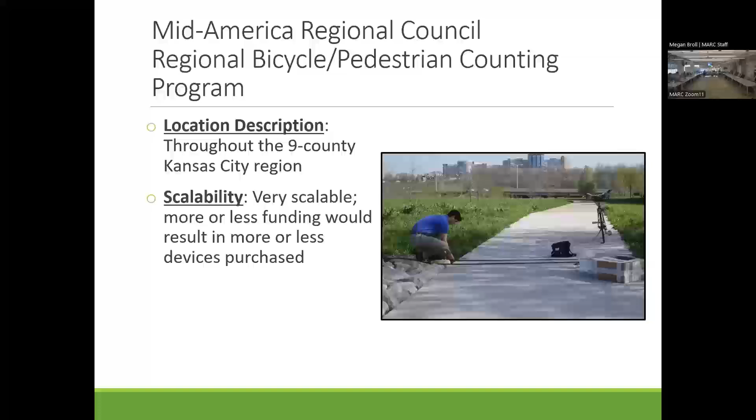Hello everyone, thank you for the opportunity to present our project today. My name is Alysen Abel, I am the city engineer for Spring Hill, Kansas.

Spring Hill is requesting STBG funding for our 207th Street project from Woodland to Ridgeview. This project includes reconstruction of 1 mile of roadway, currently an existing 2-lane unimproved roadway. We would reconstruct it to a complete street design with new curb and gutter, storm sewer, a 5-foot sidewalk on one side, 10-foot trails on the other, along with some street lighting.

This project will address several public safety improvements and needs along this corridor. It will improve vertical sight distance by cutting down a couple of the hills along the corridor. It will remove the roadside ditches and improve the storm drainage system and some drainage issues we have here. We will provide pedestrian access where there isn't any today with the installation of sidewalks and trails, and we will provide a crosswalk along 207th Street so pedestrians can access Legacy Park.

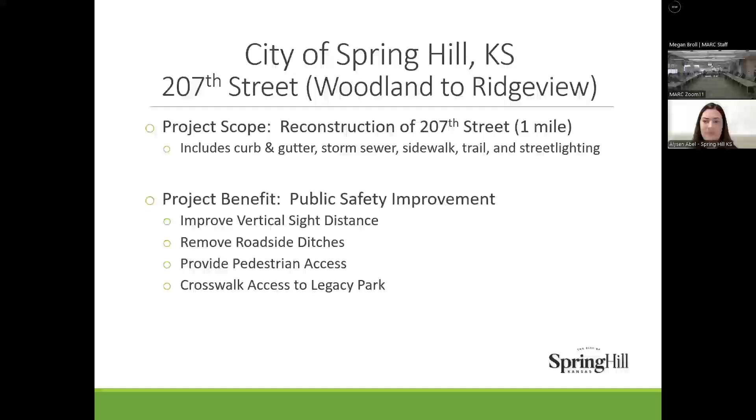Next slide please. This project is part of a larger picture for our community. Starting at 199th and Ridgeview, we have our Spring Hill High School complex, which includes the high school, district administrative offices, educational support center, district activity center, as well as a sports complex. We have a CARS funded project we're working on right now along 199th Street from Ridgeview to Renner, converting the 2-lane unimproved roadway to a complete street design with 5-foot sidewalks and 10-foot trails. This project is currently under design and planned to start construction in 2025.

The other project that connects up at 199th Street: the city of Spring Hill has a TAP application for funding consideration for the East Streamway Trail. This is a 10-foot sidewalk constructed along an existing stream corridor from 199th and Norton down to approximately 207th Street, about where this proposed project will start. This would provide the connection from the school district complex up on 199th Street, all the way down through existing and planned residential developments, and connect to other activity centers in and around this area.

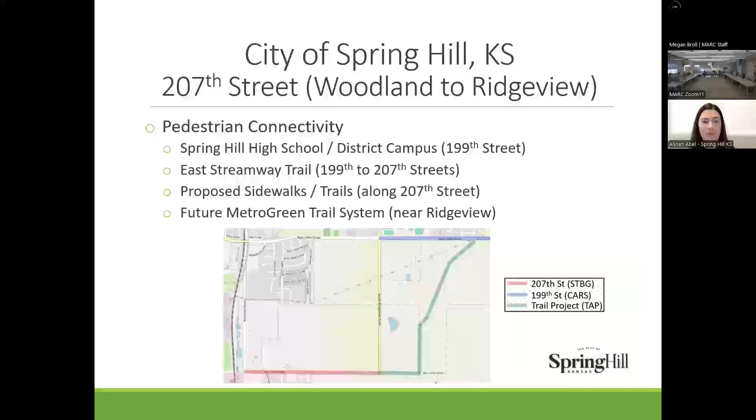And then onto the current project for STBG funding. This would connect at the end of the East Streamway Trail project under TAP consideration at 207th Street, and will ultimately connect into the MetroGreen corridor located along the tributary to Wolf Creek. This project is listed in Spring Hill's Parks Master Plan to address some of our community's priorities, most notably providing pedestrian access. There are very few trails and sidewalks within our community, and our elected officials would like to remedy that starting with this project. This is also shown on our vision plan for neighborhood development in our comprehensive plan.

Next slide please. The total estimated project cost for the 207th Street improvements from Woodland to Ridgeview is over $15 million. The total construction cost is over $13.2 million. The city is prepared to provide the 20% local match.

The scope of the project is unfortunately not able to be scaled down. It includes removal and replacement of the roadway from one intersection to another. If we were to reduce any portion of this, it would remove some of the key components of the complete street design. We have not applied for any additional funding. That's it for my presentation—happy to answer any questions.

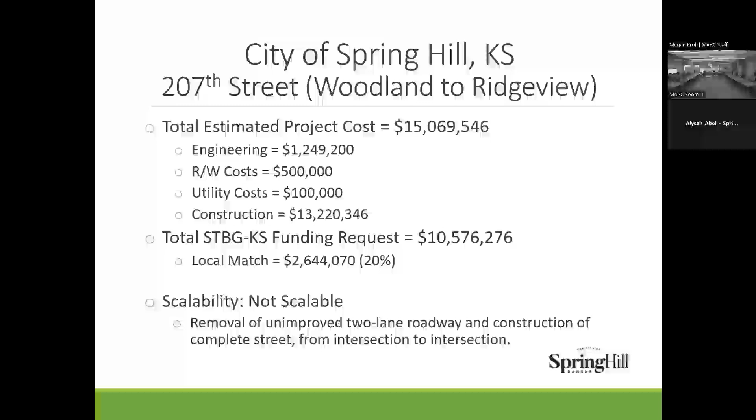First one we have for you today is our Woodland Drive improvements. As you can see on the map, Woodland Drive is an existing roadway, the north-south blue dotted line. It's essentially a narrow 2-lane roadway that acts as an arterial right now, but it's not a very safe roadway.

We've had a lot of complaints from our residents on it, and our city council has really had a lot of interest in improving this roadway. With this project, we'd be looking to expand this roadway to more of our modern roadway standards, adding curb and gutter, a 10-foot trail on one side, sidewalk on the other side, and bike lanes as well, widening out the roadway surface to make it a lot safer for both vehicles and pedestrians.

We're also looking at making a sidewalk connection north of 71st Street with the Shawnee Mission Parkway. That would basically connect all the way up to the Mill Creek Trail system, which would be a big benefit for our community as well.

We are asking for $8 million in STBG funding. The city has created a conservation TIF in this area, which means the county and the school districts are foregoing a portion of their property tax to help fund infrastructure improvements in that area. So the city is going to be able to offer a $6.4 million match on this, which we feel is a significant amount that we're putting forward.

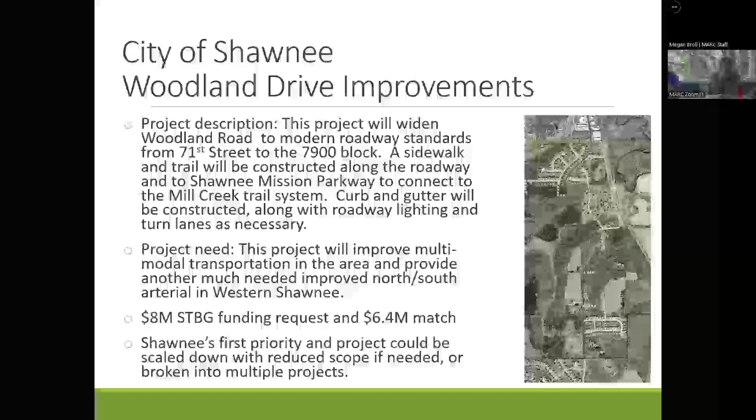This is our second project, our second priority, and this would basically be to signalize the ramp terminals at the 435 and Johnson Drive interchange.

Currently, signals are already warranted at this location, and we are in the midst of having discussions about development in this area as well with several different developers. When that development occurs, there will be a lot of strain at these intersections.

If you're familiar with this interchange in particular, if you're coming off the southbound 435 ramps looking to the west, that's towards Mid-America Sports Complex. Sight distance isn't outstanding, and it can be tough to turn off of there, going east or west. If you're looking to the east, you have the bridge that crests over the top too. So it's a challenging intersection out there.

Luckily, we haven't had a huge accident problem yet, and I think it's one of those intersections that people are aware that when you go, you've got to pull out and be ready to get to the intersection. But that's not really going to be sustainable long term.

So we're asking for $800,000 in STBG funding, and the city is prepared to put up a $275,000 match to get those ramp terminals signalized. This project really isn't scalable for us - we do just want to knock it out in one go. Any questions on this one?

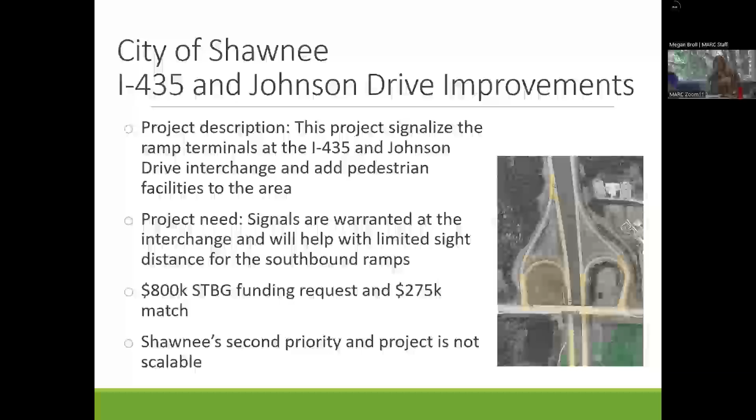Good morning, everyone. My name is Donnie, I'm with the City of Roeland Park, I'm the Public Works Director. I'll be speaking to you today about our project we submitted for the Nall Park, or Nall Avenue, Complete Streets.

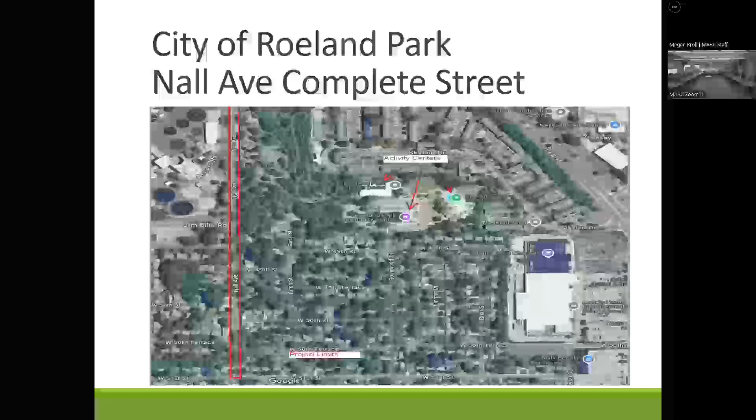The map in front of you, the red box on the left will indicate that's the project limits. We added some areas on the right side which shows access to some of our activity centers. Next slide, please.

So the project is for Nall Avenue from 51st to the north end, which ends in actually one of our largest parks in Roeland Park. Improvements will include full depth pavement, curb and gutter, installation of a new 8-foot wide multi-purpose trail, ADA enhancements, and then signing for Share the Road.

What we're trying to accomplish is to maximize mobility and access to this park and the residential areas, address street preservation and maintenance needs, and obviously provide alternative modes for the bike lane or biking facilities. This will close the gap.

There is a missing segment of sidewalk at 49th Street, about 3 or 4 blocks up from 51st Street. We're trying to close that gap by installing an 8-foot wide multi-purpose trail from that point north up to the park. Our funding request is about $2.2 million from STBG, with our local match being $950,000.

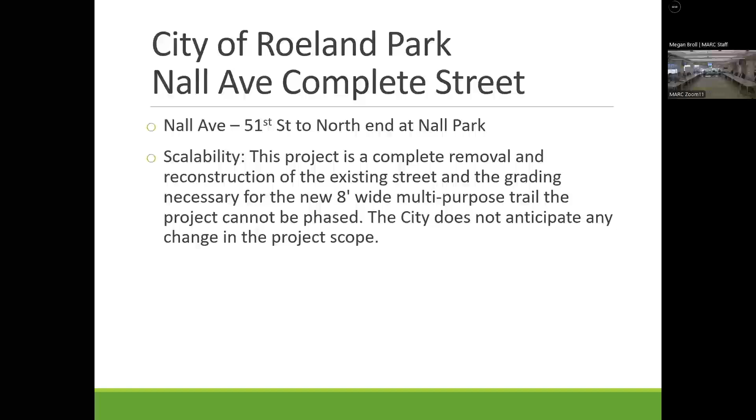Project limits are from 51st to the north end of Nall Park. This will be a complete removal and reconstruction of the existing street, with grading necessary to install an 8-foot wide multi-purpose trail. Our opinion is it cannot be phased. We don't anticipate any changes to the scope.

Working on enhancements of the complete streets elements. There's activity centers to the east of Nall. This connection would provide biking routes to those activity centers through installation of Share the Road biking facilities. Adding that multi-purpose trail to the north end will help provide that connectivity.

I did want to note that we applied for STP funding for the south section of Nall between 51st and 58th, which we greatly appreciate. That project is slated to kick off in 2025. Completing this section of Nall from 51st to the park will complete that connection.

Replacement of deteriorated asphalt, curbs, and gutters, including those trails and share the road signage.

Trying to enhance the walkability and expand our city's trail system.

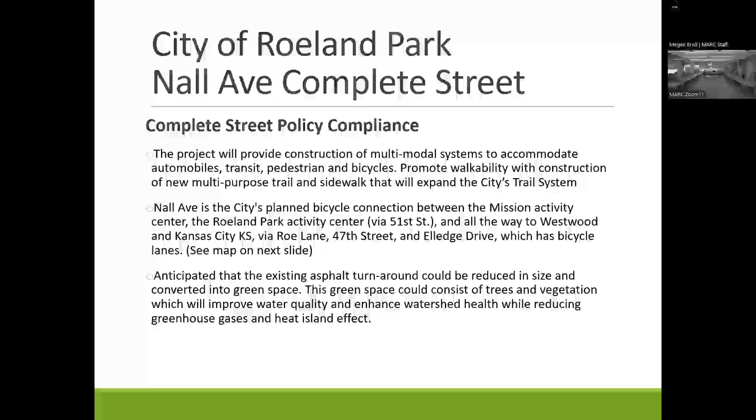We're doing south of 51st to 58th in 2025, which will have signage and sharrows. 51st Street would connect over to the east, where there's an 8-foot multi-purpose trail along Roe Boulevard.

That was completed back in 2020. There are other bike routes that will lead up to the north and over into the city of Westwood, to the east of Roeland Park.

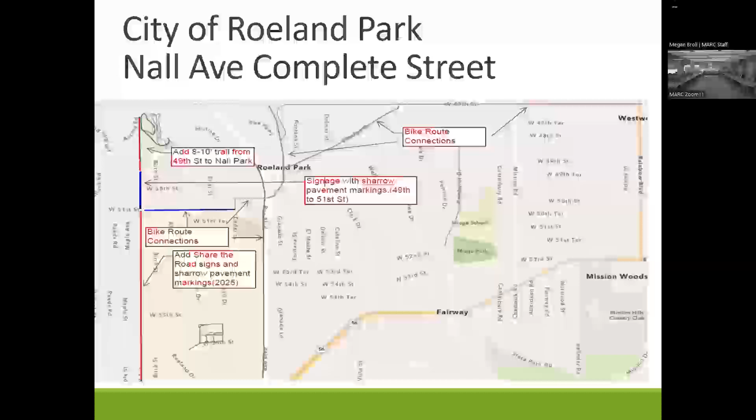We do a lot of public engagement - public meetings, discussions including projects in our CIP, having open houses and getting feedback from residents.

I think that's it. I'll take any questions. Questions for Roeland Park?

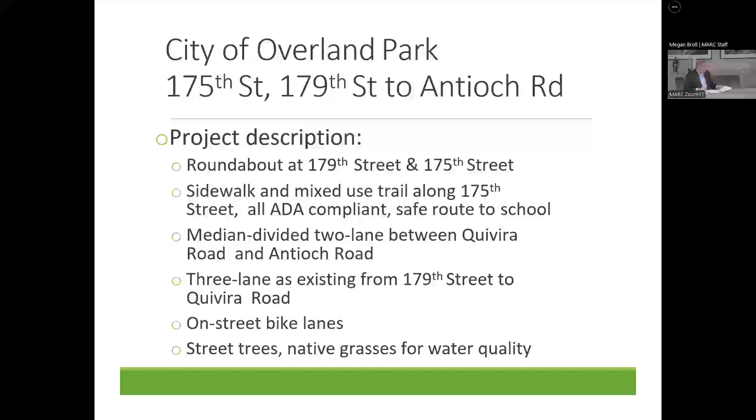The project will provide multimodal options, improve safety and system performance, address preservation needs, and serve a rapidly growing area of the city. We're asking for $7 million in federal funds to supplement the city's match of $14.5 million, for a total project of $21.6 million. This project is our first priority for the STBG funds.

So we have projects completed in design and construction in this area. We've recently built Weir Road. Our next STP construction project is Switzer Road there. And we have been heavily investing in this area.

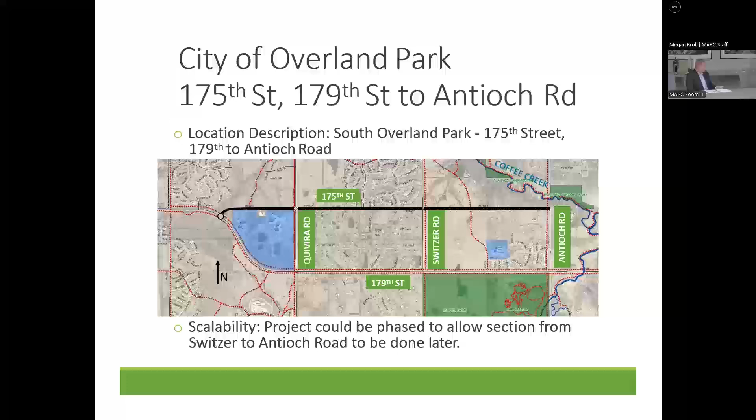175th Street today is an unimproved county road. It's very hilly, does not have shoulders. The roadway is failing under the traffic that's in the area now, and we know that as traffic continues to increase, the road will continue to deteriorate.

As you can see, there's no sidewalks or trails, and students walking to the schools in the area have no place to walk except the road. As busing availability has decreased, the number of students required to walk continues to increase. A lot of school districts are clamping down on busing availability, and that's directly impacting these residents. We've heard from a lot of concerned parents about how their kids are getting to school in this area. 5,000 cars use the road today, and we expect that to double by 2050.

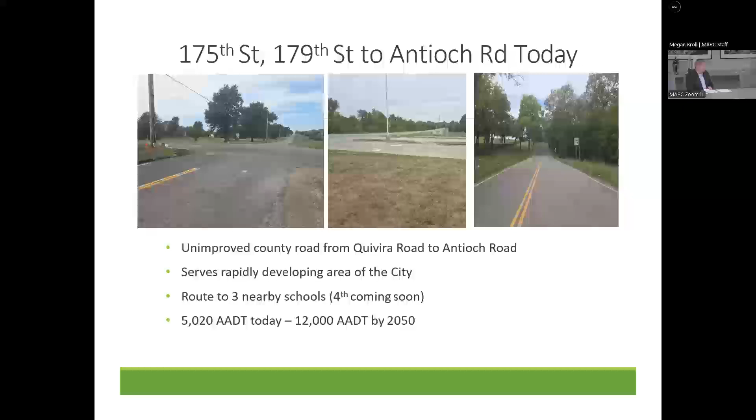So what's our plan? We're going to improve all transportation modes. For pedestrians and cyclists, we will provide the needed trails and sidewalks, as well as on-street bike lanes and shoulders. We do plan to plant some trees along this corridor. We feel like with the road section that we have and the right-of-way in place, we can put trees in the area to provide a better pedestrian experience.

As far as the car traffic, we will construct the roundabout to help with not only accidents, but emissions. And then we'll also make sure this road connects to recent improvements in the area. We know that these improvements will address system needs for years to come.

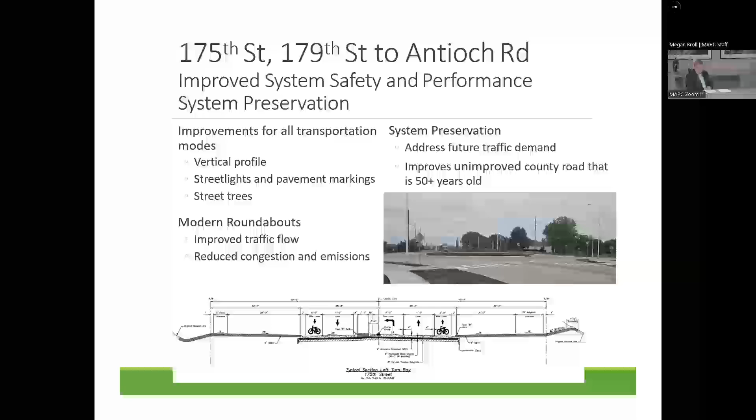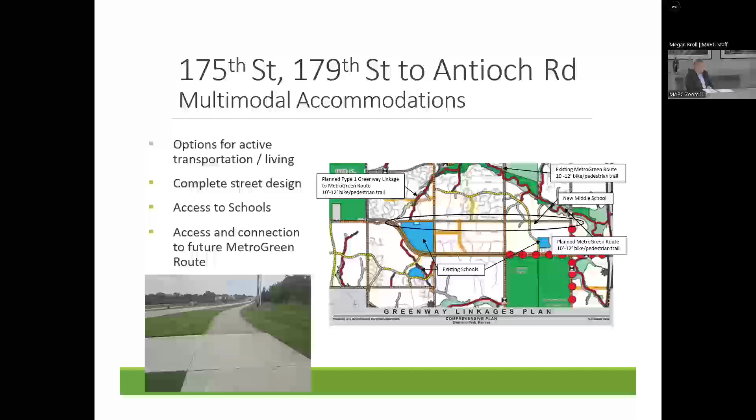Did want to mention, this is also in alignment with our South OP Transportation Plan, where we're trying to only build the improvements now that we need for the traffic now. And then we will plan to use this as a CARS project, and it aligns with our new comprehensive plan framework OP.

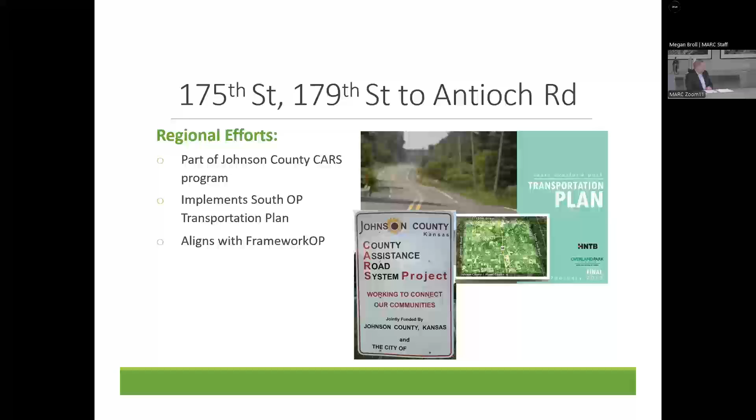So with that, we submitted multiple projects. 175th Street is our number one priority. I do have slides on our other projects if there's any questions, but I appreciate the time.

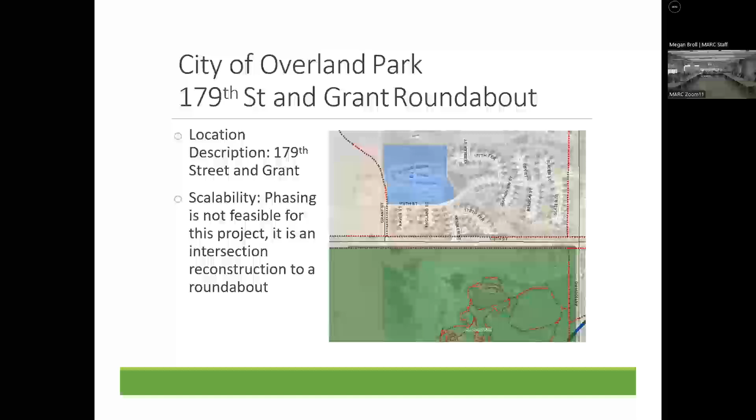Good morning. My name is Neil Meredith. I'm with the city of Olathe. I'll be presenting on the two projects the city submitted.

Our first project is Dennis Avenue, Hedge to Parker. This project will improve Dennis Avenue to a 3-lane arterial in this section. Improvements will include bike lanes, a 5-foot sidewalk on one side of the road, and a shared use path on the other side, which is typically about 10 feet. The city is requesting $5 million, with the city providing the remaining $13.7 million to fully fund this project.

This project has been identified as a priority in the city of Olathe's transportation master plan to address safety and capacity needs in this area.

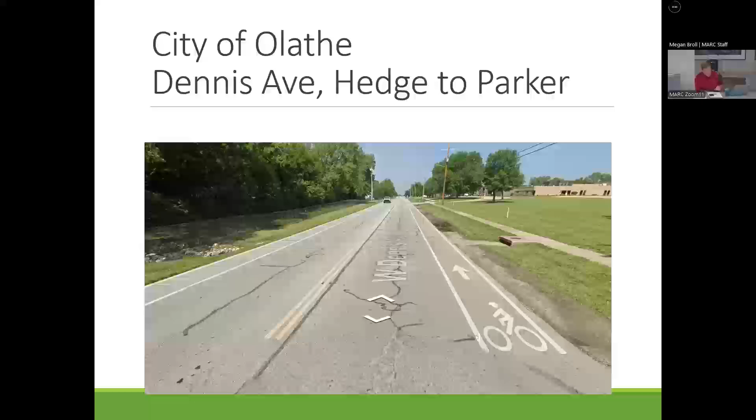Our second project is Lone Elm, 119th Street to Harold, which is 127th Street. This project will improve Lone Elm from 119th to Harold with a 2-lane divided arterial, so that would be a median with turn lanes. It will include new medians, street lighting, bike lanes, a 5-foot sidewalk on one side of the road, and a shared use path on the other, just like our other project.

We are also requesting $5 million on this project, the city providing the remaining $10.3 million in funding. Of our two projects, this is our number 2 priority.

We do find in this section as well that we have a lot of pedestrian traffic and children walking to school along the edge of this roadway, and we do get numerous complaints about that, and it is obviously a safety need.

But that pretty much wraps up our presentation from the city of Olathe, unless there are questions. Questions for Olathe? Seeing any? Appreciate the time. Go Royals.

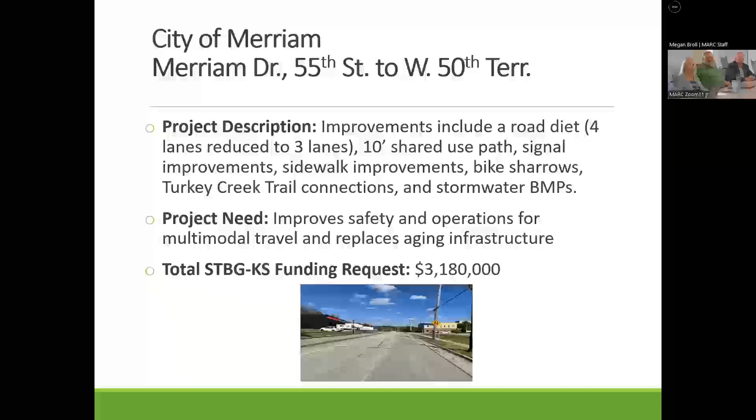So our project needs are improving safety and operations for multimodal travel and replacing aging infrastructure. Our total request is 3,180,000. Our match is 1,320,000. This is our number one priority and our only priority, and we've only submitted for STP funding.

This is part of a larger project. There's a lot going on along Merriam Drive. From Johnson Drive, we have our downtown area, which eventually we're looking at making a mixed use development. We have a Turkey Creek flood mitigation project going on. And then as we go farther north, we've been working with Overland Park on a downtown Merriam corridor plan for PSP and looking at that intersection at Antioch.

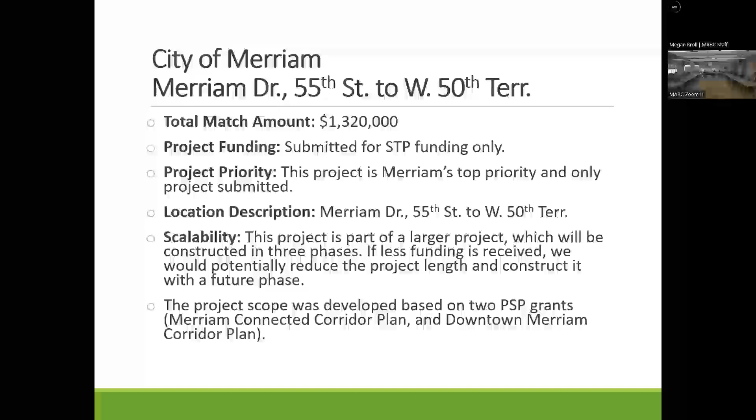So I'd be happy to answer any questions. Questions for Merriam? Not seeing any in the room or online. Thank you, Celia. Thank you. Next up, City of Lenexa.

Thank you for allowing us to present. This is Tim Green, city engineer here in Lenexa. Our first project, and which would be our number one priority project, would be 83rd Street from Clare Road to Gleason Road. The scope of the work would be to widen the existing 2-lane unimproved roadway to a 4-lane divided roadway and include signalization at Clare Road and Gleason Road.

The project would include sidewalk on one side, 10-foot wide mixed-use trail on the other, street lighting, street trees, enclosed storm sewer. We would also look at on-street bike lanes. Our complete streets plan does show bike lanes in this section.

I attended a number of the DeSoto Planning Sustainable Places meetings on 83rd Street that they had, and there were kind of mixed feelings on their section about whether there should be bike lanes or not based on the input from the bike users. So as we study this street, bike lanes will be considered, and we'll work with the bike community to determine if we should have those or what type.

We'll also have water quality - we include water quality on all of our projects. The need is a safe and efficient roadway. We have a number of schools that are either in this area or proposed to be in this area in the near future that provide access from 83rd Street. There are currently no sidewalks in the area either, so there's really no way for kids to walk to school at this time.

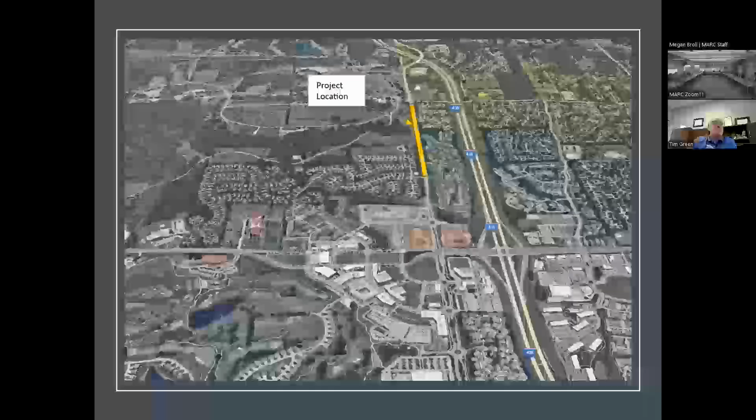There's just a quick map of where this is, the last slide for Lenexa that we didn't get to.

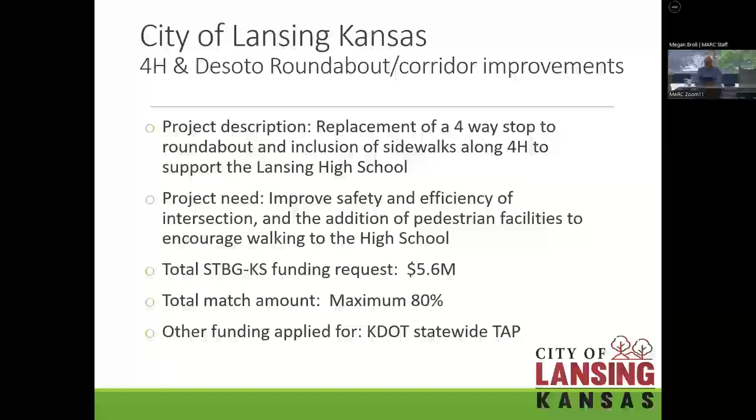The project request is 5.6 million, and we are requesting the maximum 80% federal match on that. We've also applied for the KDOT statewide transportation alternatives to try to get this. So you can see where the two projects overlap. In orange is the KDOT statewide, which would actually connect all the way to the high school, and then the project we're proposing is the roundabout at 147th and DeSoto, as well as the 10-foot multi-use path along our 4H road, our County Route 7.

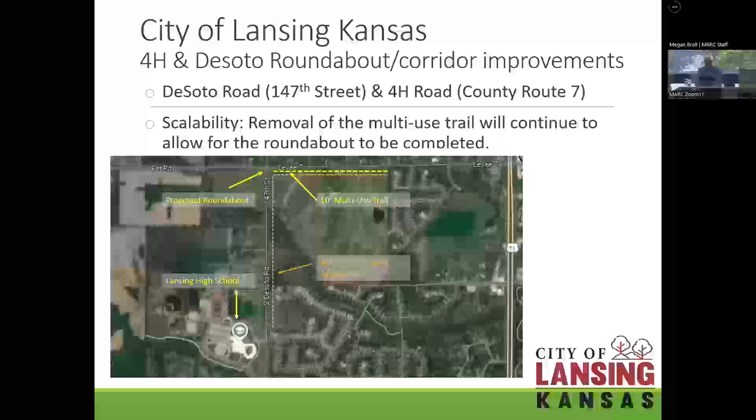For scalability, we could remove a portion of that, like removing the path, but that's really the only scalable option we have. You've seen this project before. We've applied in the past, and we really appreciate the input that we've got. It was unaligned before, but with the addition of some complete street improvements as well as some bike ped facilities, we took that to note, and then we reapplied this time.

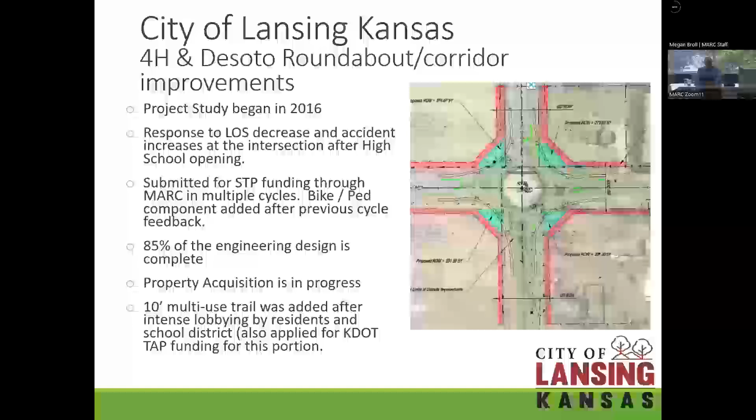Like I said, this was really in response to our high school, and like Overland Park said, there's been some busing policy changes. So there has been a pretty strong outpouring of requests for pedestrian facilities between the high school and essentially what is our municipal complex. It terminates near our library. So we've seen some intrepid young students walking in ditches, and we really want to try to avoid that. So that's kind of where we're at. The project is well designed at this point, and the multi-use trail is really a strong component of this. We want to see getting much closer to that and eventually making that connection.

Any questions or comments? Questions for Lansing? Thank you very much. Thank you, Mike.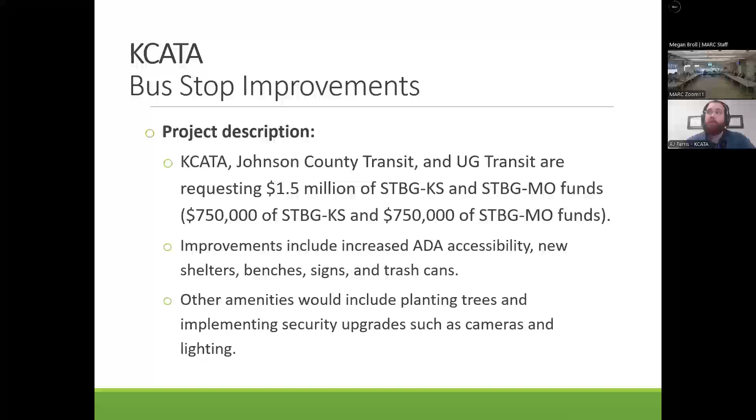The total request is 1.5 million, but from this specific committee, the Kansas STP committee, it's 750,000. We're looking to improve and include more amenities at stops, including adding more ADA accessibility to stops that currently don't have it today. We're also looking at ways to increase shade by planting trees, and increasing security upgrades like cameras and pedestrian-focused lighting.

As I said, from this committee, it's a $750,000 funding request with a total match of $187,500. This is our second priority. As far as scalability goes, this is a scalable project. Again, if we receive less than our request, we would just be able to improve a smaller amount of stops in our region. Thank you very much.

Thanks, AJ. Questions for ATA? So what is your replacement schedule for the clean vehicles?

It basically depends on which type of alternative fuel vehicle we go with. We've left this specifically without identifying an exact alternative fuel vehicle because it's good to have a mix of fuel types in our fleet. But we have a transit asset management plan, which we also share with MARC, that goes over the amount of buses we need to replace every single year to keep up with our aging fleet.

Thank you. Additional questions for the ATA? Seeing none. Thank you, AJ. Thank you, everybody.

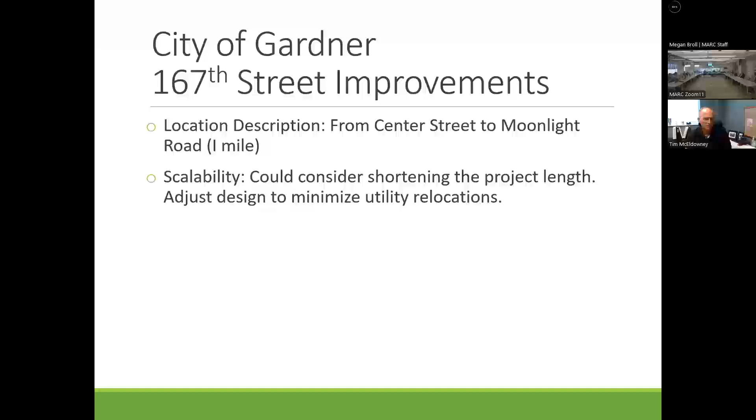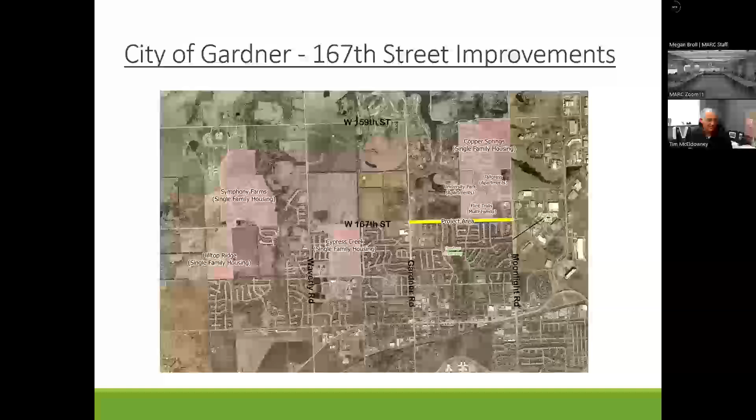It's currently residential, and we expect it to continue that way, which is one of the reasons we're focusing on the bike and pedestrian facilities. You can see in the pink, those are all active developments, both single and multi-family developments ongoing in the city. And I've also identified where we're connecting to the existing trail system, the Gardner Greenway, to the south of our project, and then Moonlight Road, which has an existing multi-use path on it.

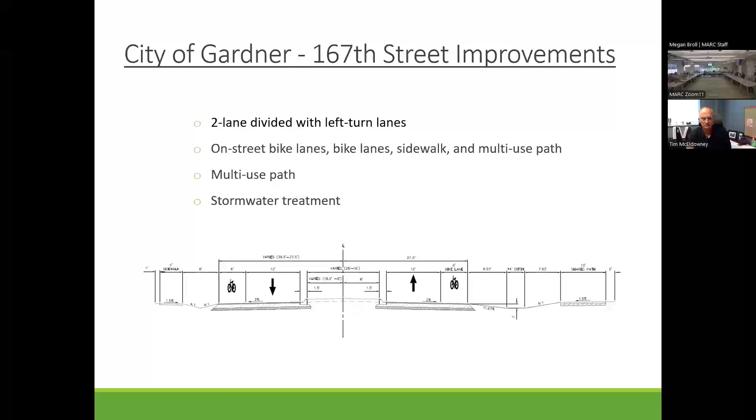Questions for the city of Gardner? Seeing none. Thank you, Tim. Thanks, Mark.

Thanks everybody for your time, appreciate it. I'm Randy Gordon with BHC. We serve as city engineer for Edwardsville. City manager Mark Mathis is here as well. The project before you for this round is the third part of the 98th Street improvements.

This project continues previous work funded through STP, widening and providing improved alignment and sight distance for the existing roadway, adding a 10-foot side path, multi-use for pedestrian and bicycles, as well as making some significant drainage improvements along the corridor.

As I mentioned, the existing road—we'll have some photos here in a slide or two—shows how narrow this kind of old county rural section is. Growth has started to occur both within the city limits as well as just north across the municipal line into Kansas City, Kansas, on the north side of I-70. So this is intended to create really a viable surface alternative to 435 as this development continues and probably accelerates as other improvements are made that would support higher densities.

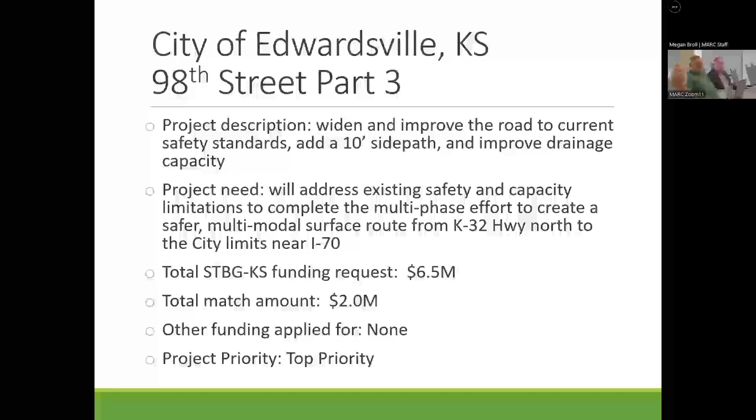Next slide please. Again, this would go—I'll show you a map here in a second. In general, at the end of the Part 2 project currently under design, which is south of Swartz Road, close to where Metropolitan connects with 98th Street, right in that vicinity. It is scalable, although we're basically into the last mile of this improvement from K32 to the North City limit to tie into KCK. So it would be nice to go ahead and tackle this all at once, but we can shorten it up if needed.

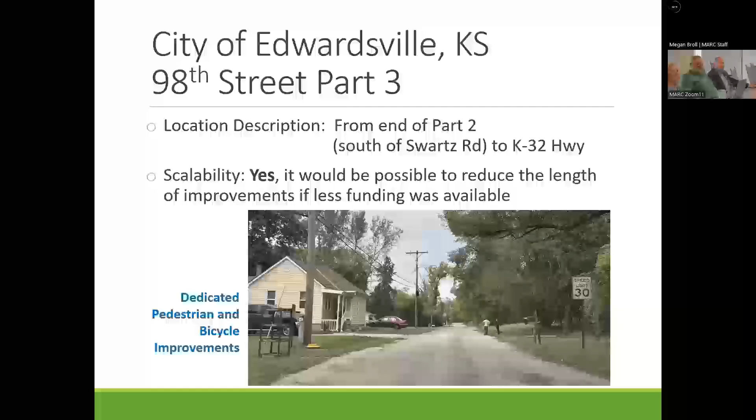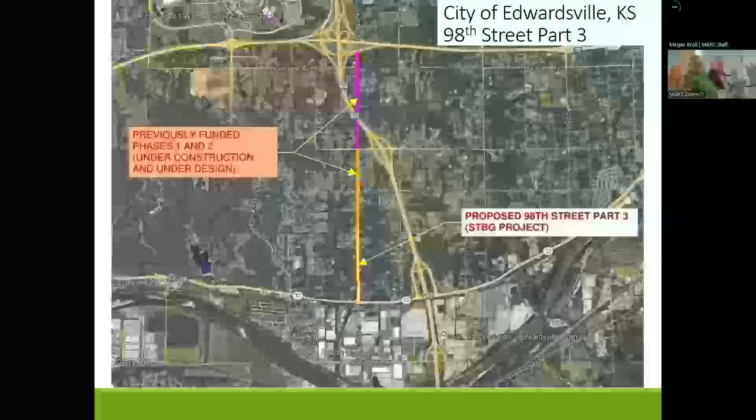Next slide please. Back slide please. So again, the city greatly appreciates this. This serves not only the municipality of Edwardsville, but it provides some adjacent benefits. This is also connecting two pretty good sized activity centers, right? You have everything on the west side of Village West. There is a significant industrial park area on the south side of K32. And so that creates certain opportunities for developers and demands upon the transportation network.

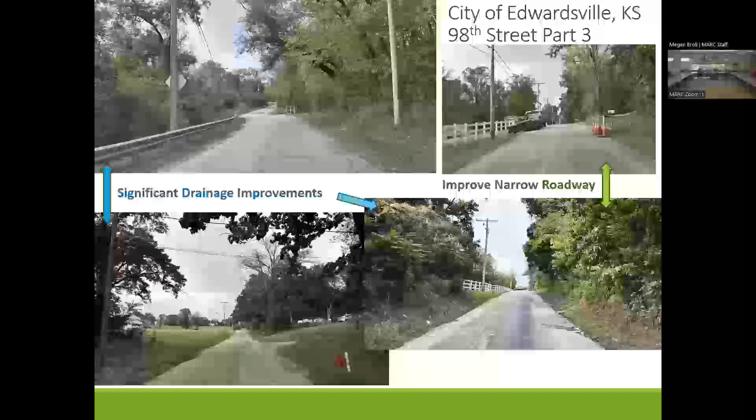The city, back in a previous call for projects, received $1.5 million for the bridge. We thought it would be an easy bridge project, fortunately it spans over a railroad owned by Sunflower Redevelopment, and they're fine with the height. Unfortunately, we could not get BNSF to agree, and now we have to go back and look at raising the bridge several feet to accommodate the clearance. So this request is for $2.9 million, which will give us a total of about $4.4 million for the project. We're now at $7.8 million total, and the city's match is a little over $3.5 million.

The bridge was originally built back in 1948, and currently it's structurally deficient, so we have it inspected about every year to check its condition. It really does not accommodate pedestrians, though people sometimes walk across it. There's a narrow concrete pad pedestrians use, but the sidewalk connections are poor. So the new bridge would be wide enough to accommodate on-street bike lanes and sidewalks on both sides, and those improvements would extend to the roadway as we tie back into the existing roadway structure.

To the south of us is the elementary school and the high school. As we improve things, we would tie these improvements in to give pedestrian and bike access to the high school. This also connects to our downtown — actually it's the major link into our downtown area. As we improve the roadways into downtown, we would carry the improvements from the bridge and the adjacent roadway into our downtown area.

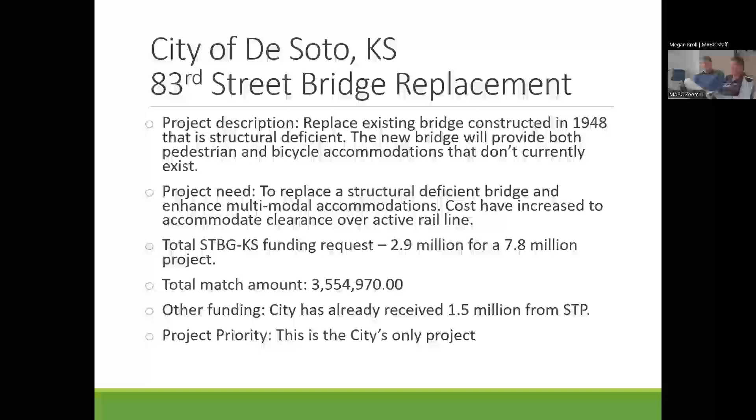The city has two trail projects that we submitted for this funding cycle. I apologize that the text is a little small on the screen. First is the Coralberry Trail project. It would provide a little over half a mile of trail connectivity from one of our western neighborhoods to our civic campus, which includes quality-of-life amenities like a fishing pond, an event lawn, an amphitheater, and a splash pad. We're really growing, and our pedestrian facilities have not kept pace with that growth.

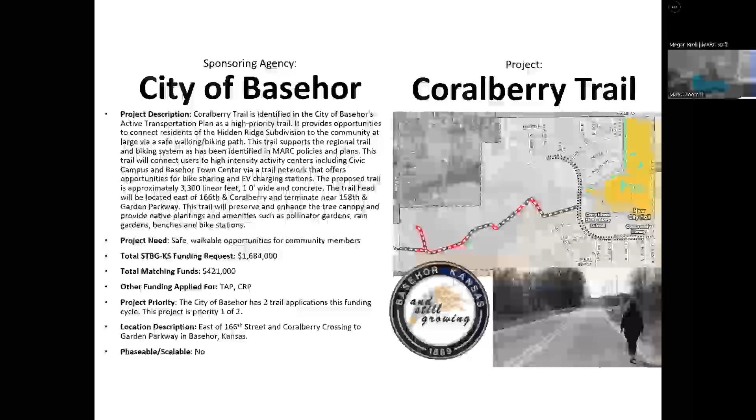You can see on the screen that right now, if someone wants to walk to the civic campus, they have to walk either in the roadway or in an open ditch. We're really trying to make that the exception rather than the rule in Basehor and flip that script. So our request is $1.684 million, and the city is prepared to make our 20% match. We have also requested funding from additional committees through the Mid-America Regional Council, and the city would be delighted to receive our 80% from whatever pot is available.

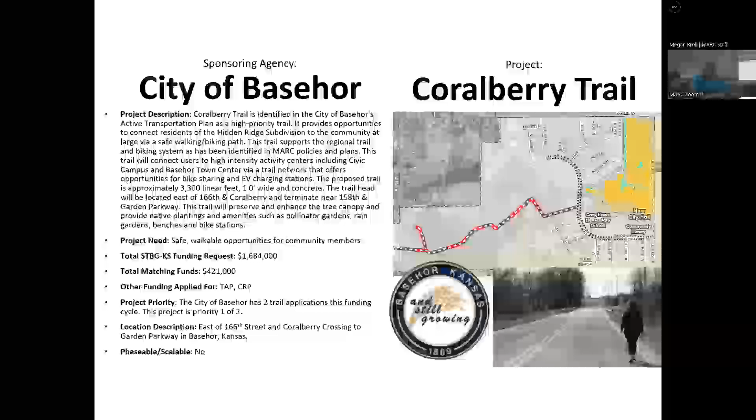This particular project is the highest priority project for the city, because as you can see on the screen, it's pretty much a straight shot, just a little over half a mile of trail. Unfortunately, this project is not scalable at this time. I'd be happy to stand for any questions regarding Coralberry Trail. Questions on this particular project for Basehor? Not seeing any online.

And our second trail project is Trails at Basehor Town Center. Again, very similar sentiments - our pedestrian facilities have just not kept pace with our growth.

You can see on the screen a picture of our students. That's not a posed picture - that's actually a picture our school district posted on social media. They were walking to a park and posted it as a celebratory picture. As the city, we really took it as a call to action. Our kids deserve better than walking in the roadway or an open ditch.

So we are really just taking that charge and trying to connect as many of our neighborhoods to our activity centers as possible. We do have two applications, and this is our second priority at the city of Basehor. The request is 2.5 million and the city is prepared to make our 20% required match. I'd be happy to answer any questions.

Questions about trails at Basehor Town Center?

Seeing none. I know that the Active Transportation Programming Committee met yesterday. They didn't necessarily take any actions, but they are actively working and will meet again in the future. The carbon reduction program, also applied for through this program, will be handled by a new committee here at MARC, the Transportation Emissions Committee. I believe they have met, not to discuss projects - they're still working through logistics of a new committee, but I do believe they have a scheduling poll that closes tomorrow to determine their next meeting, when they will actually start talking about funding applications.

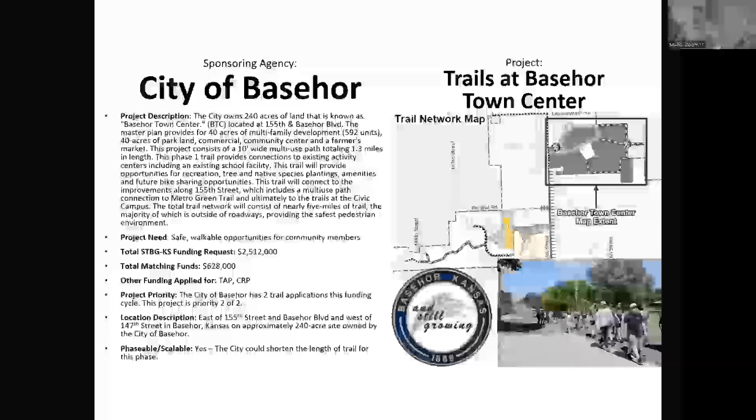So hopefully, as this committee gets started working on things, we can keep you informed as best as possible about the activities other programming committees are doing and where the overlaps may lie, and see if we can't leverage federal dollars pretty much all over the region in a more efficient manner.

So I believe Basehor is the last of our presentations. Thank you again to everyone for putting these together and attending, either in person or online, and walking through your projects. I realize this is a big process and it's very important to all of your jurisdictions. So we do like to give you the opportunity to talk about your project, make sure everybody understands it as we're going into programming. The score does some of that, but maybe not necessarily give you all the details about why it's particularly important to your communities. So this does provide a good opportunity for that.

Some next steps about our programming process - as I mentioned earlier, we are still working through requests for scoring modifications. We're close to being finished on that. Everybody involved is now back in the office, so we will hopefully get some closure on that. I'm certainly ready to wrap that particular piece up and get those revisions out to you. Once those go out to everyone, we will also get you a full list of the scoring so you can see everybody's project together and how they scored.

We do like to give you the opportunity to ask questions about your scoring. We find it to be much more efficient and better for you and for us if we do that outside of a committee meeting, because there are multiple staff members who score all of these projects. So it's much easier to farm those out to folks and give them time to look at it rather than trying to do it on the fly in a committee meeting. So we will get those out to you. At your next meeting, we will ask you to formalize and finalize the scoring so we can put that portion of things done and move on to the next portion of trying to figure out how to actually allocate funds to projects here.